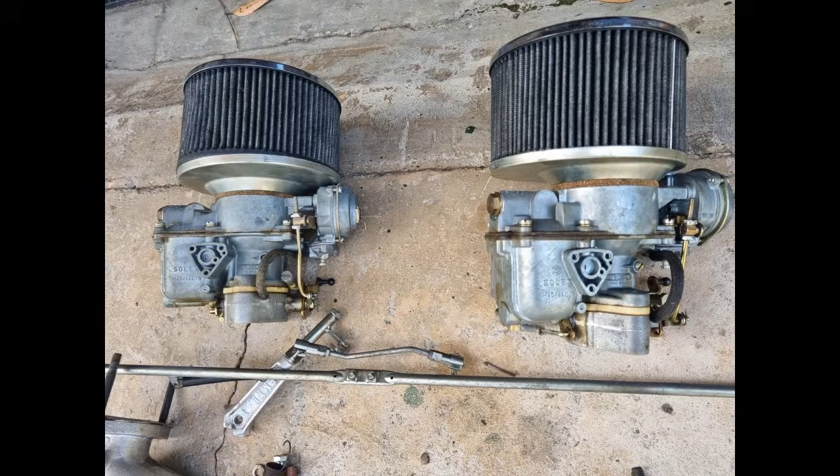Initially it was the '76 T2 bay window Kombi, air-cooled, 2 litre, all original, still mostly original paint except for on the front. It was a bit lacking power, so we tried a carby upgrade, which didn't make much difference. We went electronic ignition and a few other things, but we just wanted something with a bit more power.

As you can see, we like to go camping and stuff, and it was alright to drive as a daily. I had it for years, put a smile on my face, but in summer it was very hot inside the car because we live in Queensland.

So aircon was good, and we wanted a reliable daily, so we went Subaru in the end. This is where we first started just getting it lifted slightly.

Now, we did not do anything special. This is just the rear end being raised with the torsion bars to a fairly safe level. That's the original wheels and tyres.

The front was already sitting fairly high, which is good. It hadn't sagged, so not much was done to the front end, actually. We just had the back end lifted a bit, and you can see it's quite a bit higher even with the standard wheels.

We then also upgraded to some bigger wheels and tyres, so we didn't want to go crazy. We also fitted sliding glass windows all around the back, which made a massive difference to how cool it was inside that car when you drove. Just crack one of those back windows open and it was fantastic.

Now, this is with Mercedes-Benz Vito rims, 15-inch ones. There's different offsets, so make sure you get the right offset. The ones that are too deep dish you don't want. We ended up with 3 of each, so we've got all new tyres. The tyres are 215 75 15 Nankang all-terrains.

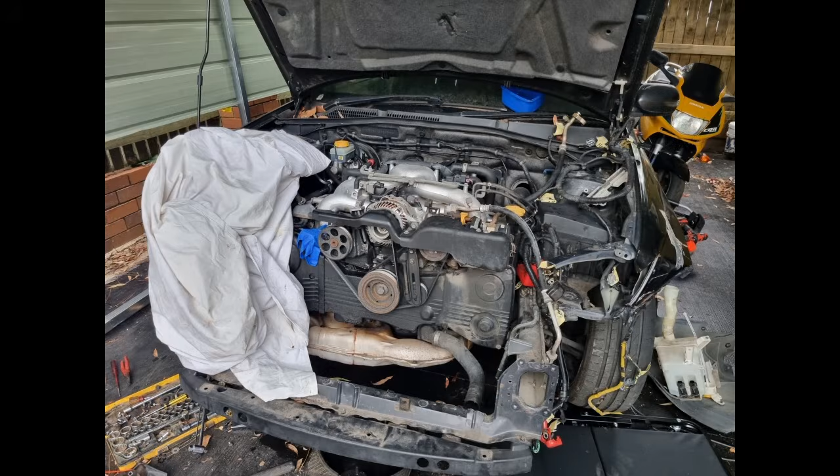So that's the donor car, which was a 2007 Subaru Liberty. You can see it's got a bit of damage there. I bought that for $700 and it still drove. Automatic EJ20 double overhead cam, air conditioning, everything still worked in it. It had a week's rego left. The guy crashed the front section and I bought it for $700. Had about 250,000 Ks on the clock, which is not much for these cars. That is a 4EAT automatic transmission, which is the one you need if you're going to do the Subaru conversion to automatic.

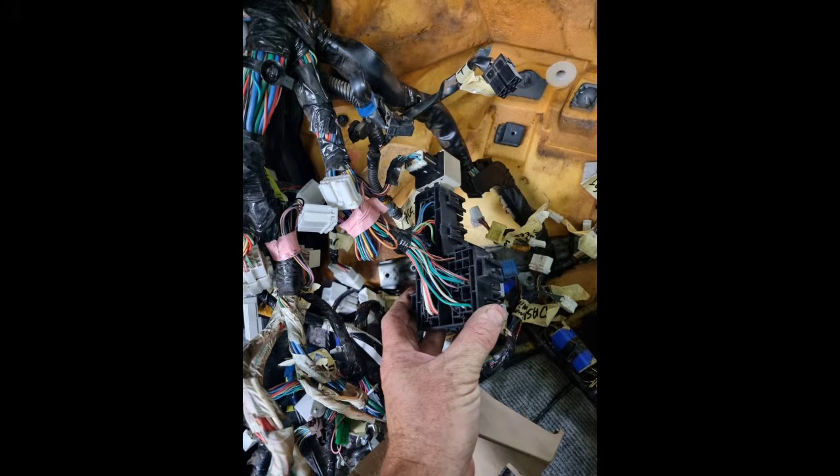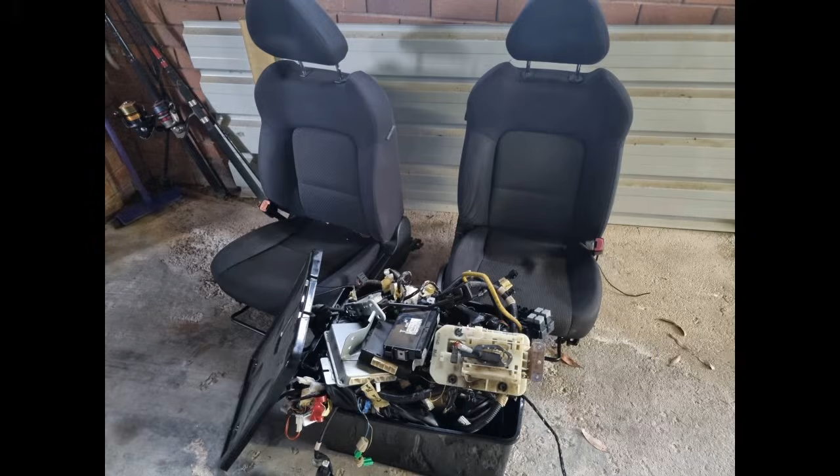So basically I removed everything. Get a donor car, don't buy parts here and there willy-nilly, and strip everything out of it. We took the ECU, all the wiring, the throttle, because it's fly-by-wire, so the accelerator pedal, just everything. Don't throw anything out, just strip the shell. Even when you've got the shell, it's handy to hold onto it for a little while in case there's nuts and bolts and stuff you need. I moved mine on and then accidentally realised I didn't collect the ignition barrel, which I needed, so I had to go back to the place I gave the shell to. Make sure you get everything out.

That's the box full of parts. I took the shifter, the factory shifter. I ended up building a little box for that to sit in. That's the ignition barrel, the thing I almost lost and didn't have, which you need when you do the wiring. The wiring is a nightmare.

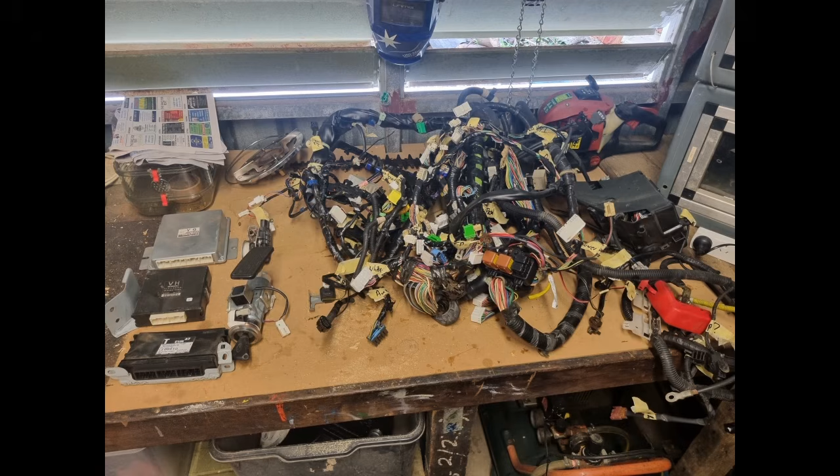If you can do it yourself, go for it. If not, I use AGT Engineering at Newcastle. I think he's Andrew, fantastic, did a great job. Send it to him. Did it all. It costs you a bit, but you get it back. Plug in, get all the modules. One of those is airbag, I think, but the other two, you've got to make sure you get your body control module as well as your ECU.

So the process I did, obviously I stripped it, got it all ready, and then I started removing the original running gear from old Lucky. We call him Lucky, the Kombi. It was in great nick, we sold that on, and as you know, air-cooled engines and gearboxes, especially a 2-litre gearbox, fetch silly money, so that helped fund some of this conversion.

That's just me mapping out something at the front there, because I wanted to have a front mount intercooler radiator. Came across this bull bar for a couple hundred dollars, thought I could make that work. It was off a Kombi, just painted it white. Had to trim that middle bar out at the top, and the radiator and that I got was just all off eBay stuff. This is out of I think a 1970s or 80s Corolla, and it was just a thick triple core, all aluminium, fit in there really nicely.

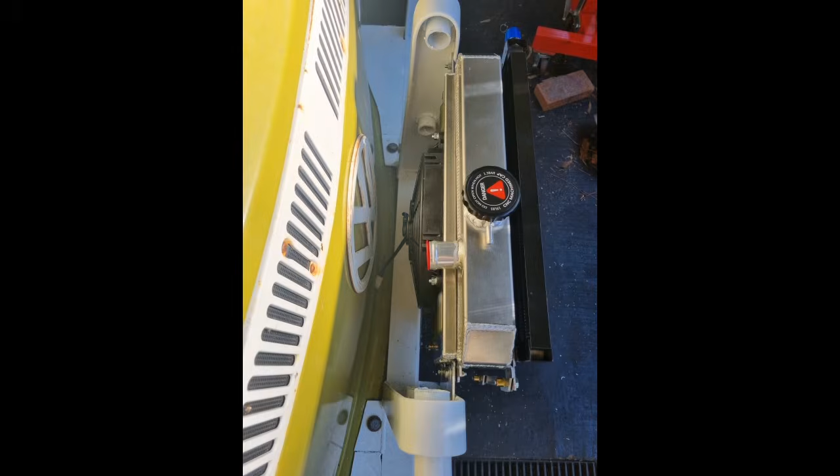That's the original air conditioning condenser, which I have since replaced because the eBay crappy ones didn't work. It was not enough fins and rows. Those generic ones just couldn't cut it once it hit about 36 degrees. So I've now switched to a Daihatsu Terios one.

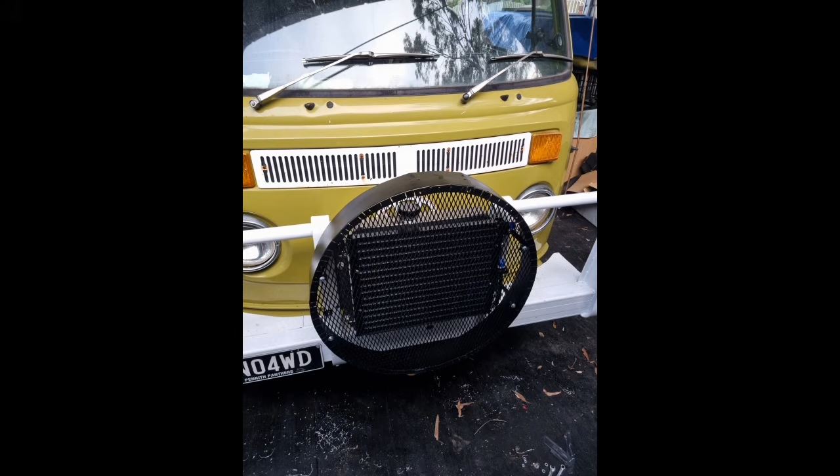This is just me making up a cover. I made up a fake wheel at the front. That was just some tin metal, a few slots in it to bend it, and some of that hard mesh, to make sure it doesn't get stone chips. Painted it all black, fitted it, realised you can see too much through it, you can see right through. It looked a bit weird, you know, when you have a spare tyre there, it's all black. So I ended up just cutting a couple bits of timber, top and bottom, and sit them in there to block a lot of that out, just to make it look more like the spare tyre. The little bits on the side you hardly see.

This is the shifter mechanism. Using the factory shifter was good. I used a 12-foot speedboat cable off eBay to connect it. It was quite cheap, well less than $100 I believe, like maybe $50 or something.

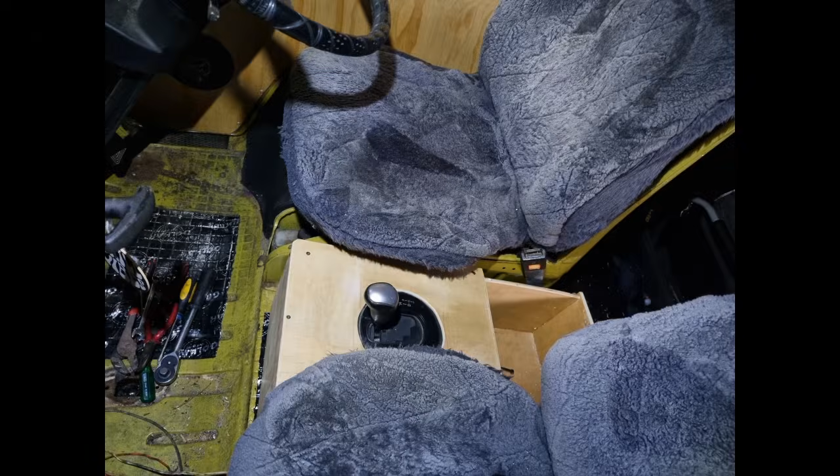I made up a little wooden center console. I left a nice big box behind it so I can put milk, bread and things in. We've put a cup holder on the front too. It's fantastic, sits in a great spot, easy to use. It's the sport shift auto, so you can change up and down gears. Everything works - that's the shifter cable I bought on the right, very similar, I had to cut and weld.

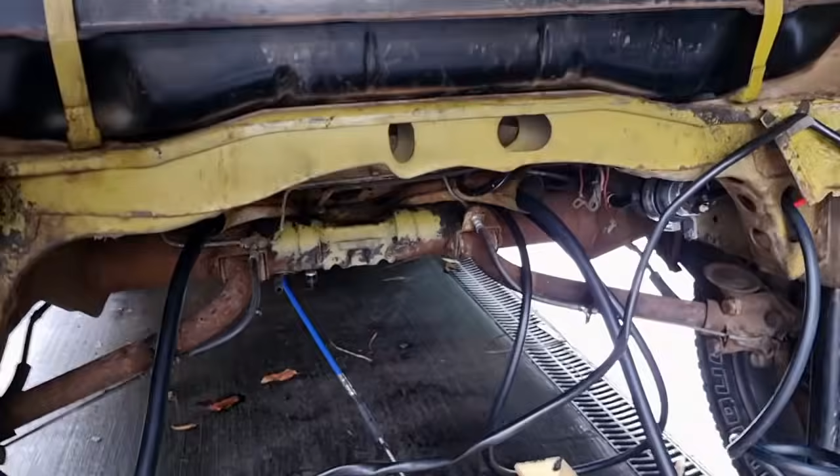Quick update here, because I've realised there's not much info out there on doing the Subaru automatic and EJ25 into the T2s. Plenty of info on the T3s, but one of the major issues is there's no off-the-shelf engine mounts you can get.

Obviously the old bar used to go here, can't use that. This area is where the ones available in Australia, like Volks Mods, fit, but that's for mounting an EJ motor to a VW box. When you're mounting the automatic, it sits a lot further out from here - further forward, from the videos I've seen in America, maybe 3 or 4 more inches than where the EJ meets the Volkswagen box.

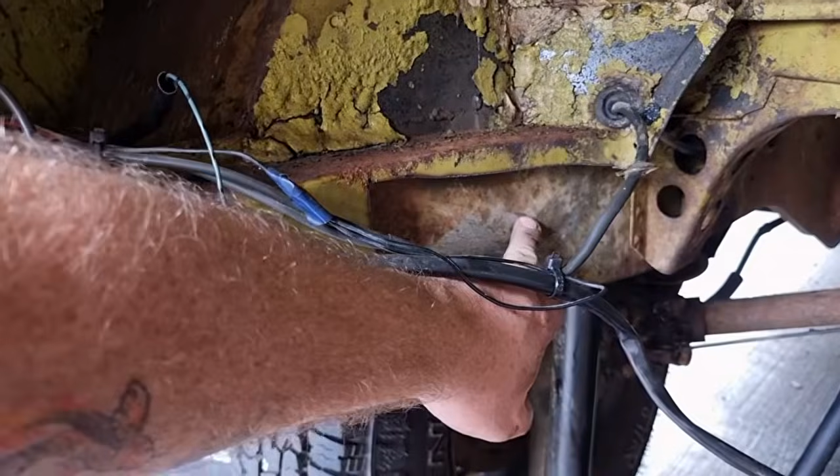So it sits a lot further out, which means engine mounts on the EJ need to bring it further forward, up to about this area I believe, where it curves in. That means the one I bought that mounts to here is no good - I might have to get one custom made to go here, because it's a lot wider with a bit of a curve.

But I'm going to wait until the engine is dummy fitted up in here with a block and tackle or something before I decide that, because I've got to mount the other end of the auto.

You'll probably see the cable there, it's a 12-foot marine cable. That's where my return hose goes in - I'll get a proper bung for that. Return line for the fuel tank, you can probably see up there.

I've got a Bosch electric fuel pump. Had to get an adapter to go from the tiny outlet of the fuel tank, something like 5 mil, up to the bigger hose - which is 5/16, pretty much what all the Subarus use. So I've got my inlet and outlet sorted there.

I've got to wire that up. I've got AGT doing the wiring, so I'm going to wait till I get it back from him before I do anything else.

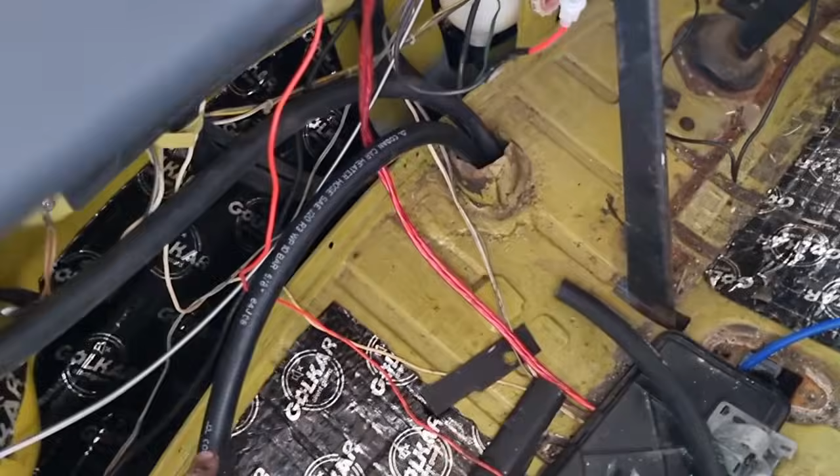Up front, I've got the aircon going in here, mucking around with that. That's the heater hoses coming up, that's a unit and shifter - just pops out the front there, cable goes down and under.

Okay, so as you just saw, that went through some stuff there. This is the engine, just sitting outside it. As you can see, it's a double overhead cam version. I didn't buy it for any particular reason, it was just the best donor car I found at the time. In the end, there's a lot of good things about it - it's more powerful.

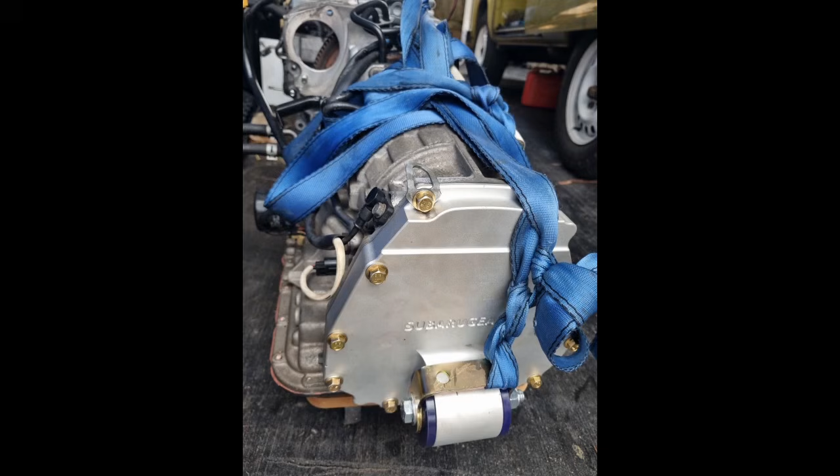I initially went with a Subarugear chain setup, because at the time that was the only one available on the market. That's it being mounted up - as you can see, it only runs the front wheel drive part, not the rear. I ended up having troubles with this and had to switch to a different system. It was extremely loud, the chain just drove me insane. You'll see from the videos.

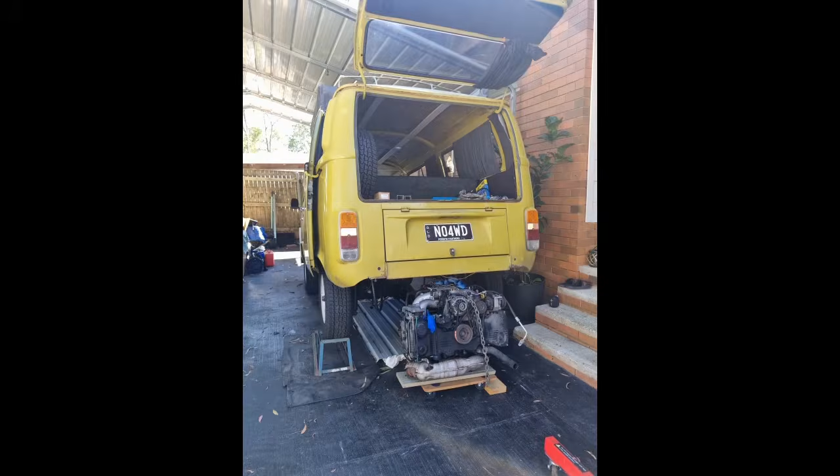Getting a much bigger, heavier one in was a bit of a pain. So I got it up onto the stands there, then slid it under on some old tin I had, scratching up all the concrete, then lifted it up through the gap with an engine crane.

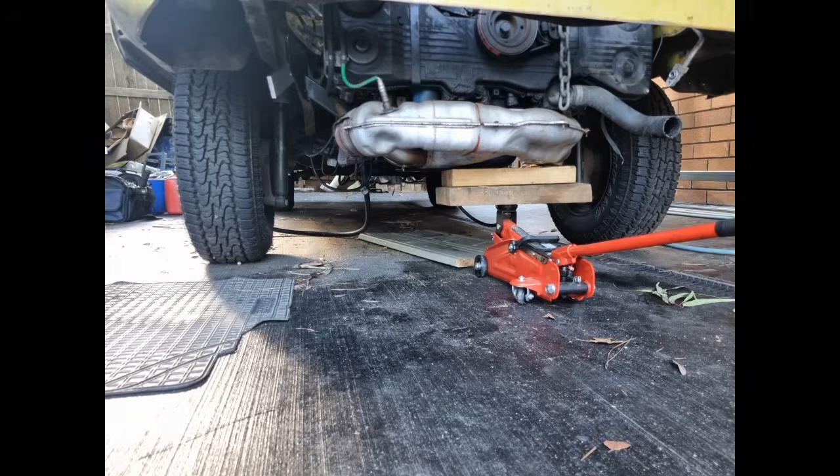I did all this by myself in my carport, so you can do it too. It's not rocket science - you've got to have a bit of stuff and a few tools, but it's not unachievable. So this was just trying to figure out where I'm going to sit it. Initially I wanted it as high as possible because I want to go off-roading in this thing.

Okay, update. We're starting to get there. Got the EJ20 in, trying to get it up as high as possible because this is kind of an off-road bus, so I've still got a good 30 centimeters of clearance there.

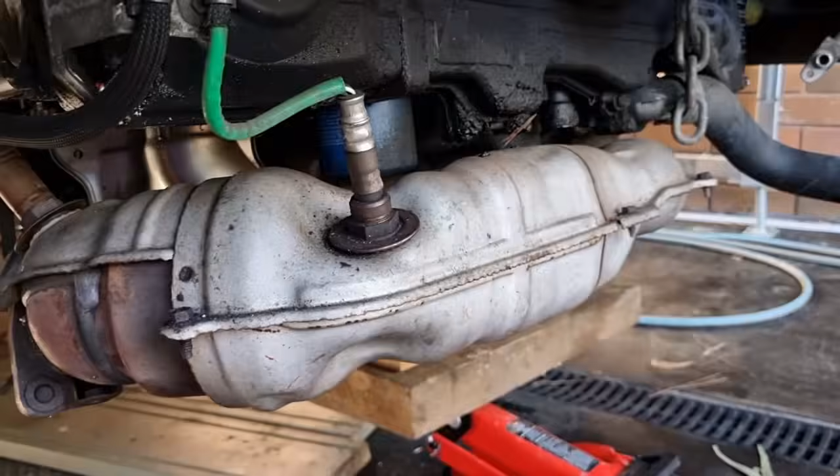In my setup, I'm still going to use this factory exhaust, which just comes out to here. As this cross member I'm about to do, I've got the 4EAT Subaru auto. Yeah, so as you can see, there's a lot of test fitting. Each car will be a bit different, whatever gearbox, whatever engine, whatever cross member you use.

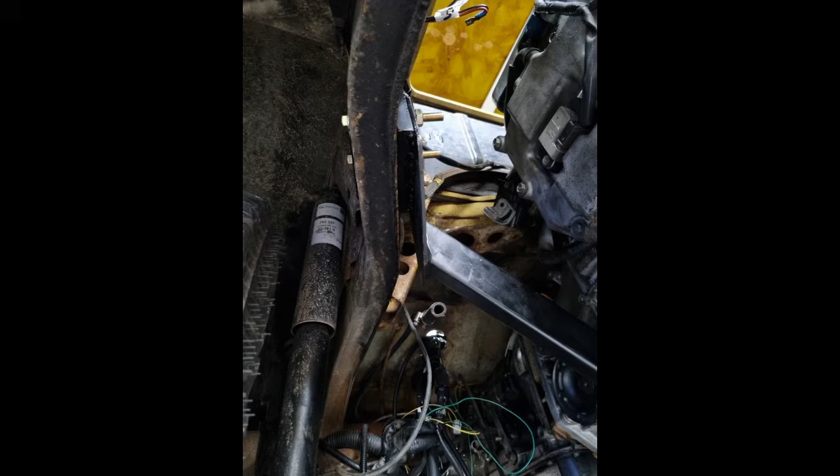I ended up using a cross member, just modified it slightly. So I did initially have it raised up fairly high. I was just eyeballing it from other people's jobs, getting it sitting nice and flat. So you can see there I had to put a little spacer in, solid steel, on each side, about 12 mil plate, and I actually welded it and then drilled the hole right through to sit it in that exact right spot.

That seemed nice, but I did end up dropping it slightly because I had issues with my CV joints later, which I'll go into detail later. So don't sit it up as high as possible - it may affect some things later with the 4EAT, if you've got a raised bus. If it's not raised, it doesn't matter.

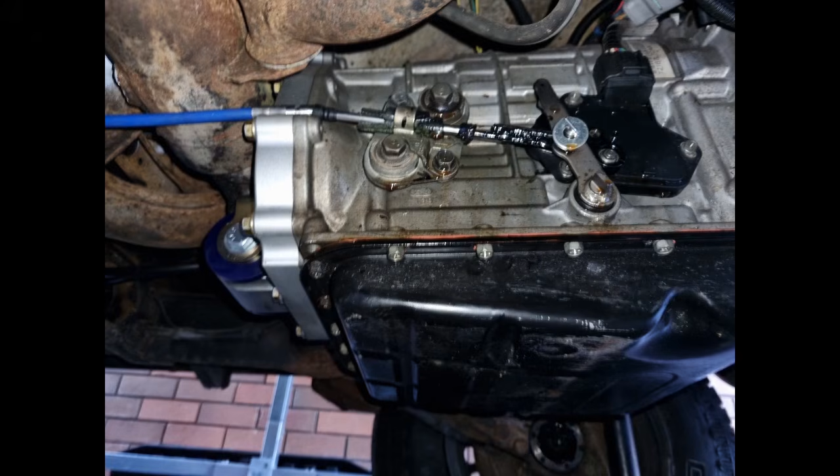So everything goes under the back seat there. That's the cable from the 12 foot boat cable. Ended up with that one.

Okay, quick update. I think it's about the 24th of August. Motor is in.

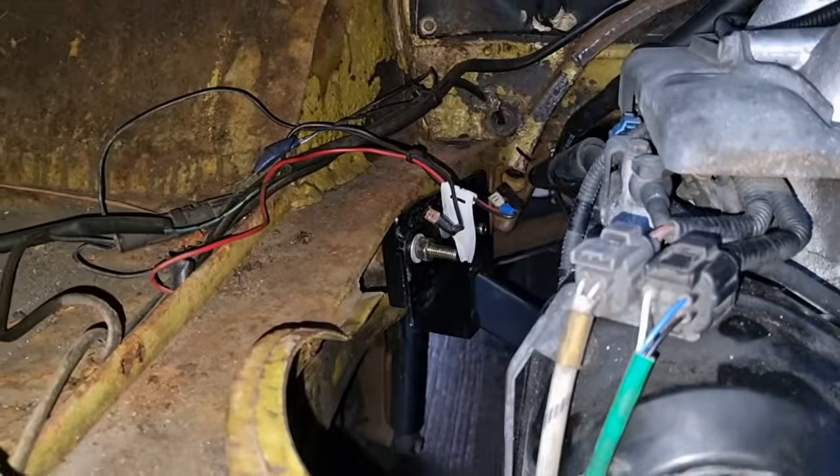Engine mounts - I'll turn this light on. Done down there, both sides. Ended up using about 16 mil solid piece of steel. You can see down there in the middle there's a spacer, but I actually welded it to the original one, only because the whole engine sits a lot further forward, as you can see, than a Volkswagen one does.

Not as much as I thought in some videos I've seen - I think different makes and models vary. You can see with my throttle body, still don't have much room, a couple of fingers, but I've got a few ideas for that.

My return line for my fuel goes up into there. It's a special fuel line that can be submersed. Goes back, plumbed down the intake pipe. All the fuel system is now hooked up. I'm keeping the aircon because I'm going to run aircon.

I've got some wiring left to do. This is a double overhead cam one, so it sits quite nicely.

We wanted it high because we want to go off-road, and with this we've got a limited slip diff fitted into the automatic Subaru gearbox as well. Still got about a good foot of clearance.

In this model, the exhaust is actually really good. It wraps around, I guess, the sump and sits quite nice and tight, and the outlet's just here. So they'll have a catback exhaust - all that stayed on it when I did the conversion.

I don't need to pull it off for the sake of maybe saving 1 inch and spending a fortune on a custom exhaust. See if I can see, so you see it sits quite nicely tucked up in there.

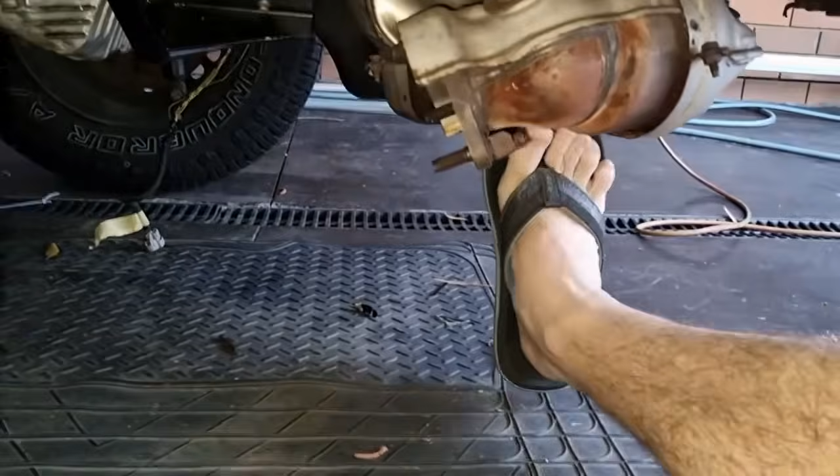Same, there's the sump, it's the bottom of the cross member, bottom of the gearbox, so really it can't go that much higher. I'm not a big foot, but it is about 30 centimeters to the lowest point, which is pretty good for what we want.

They had backing plates on that bloody thing that was from a pre-made one from Volksmods.

Underneath is the auto hookup. Still trying to work out this bloody thing.

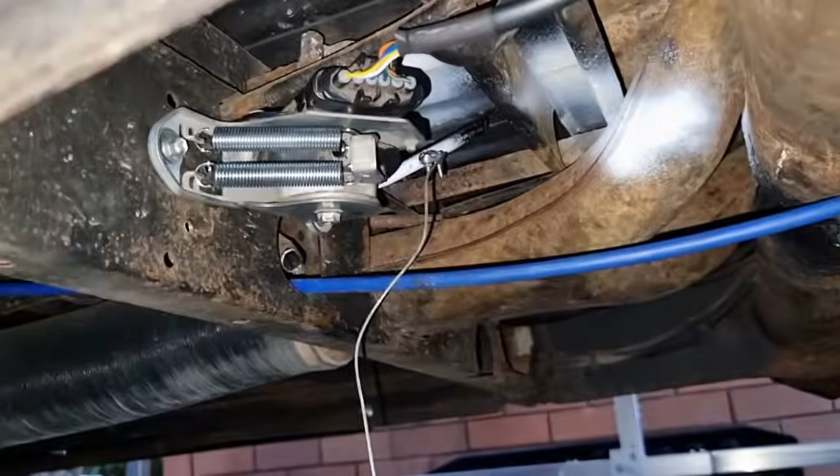Okay, so after that video, a few things changed anyway, but as you can see from the throttle body it's quite close, but you can actually fit it - I bought an eBay 90-degree bend and it fits on there.

Just another note too, I forgot to mention, just under the fuel tank you do have to cut some of the metal out prior to fitting the Subaru stuff. Here's the first start.

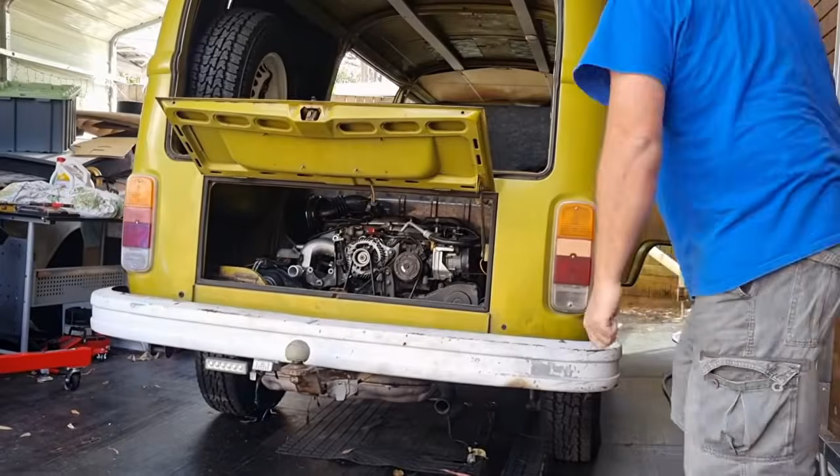Obviously it was a bit loud. Idle wasn't set, the throttle body and all that wasn't working in that setup underneath. I tried to listen to other people on the internet, it didn't work out. So I had to change that later and use an accelerator pedal, the e-throttle or electronic throttle, fly-by-wire throttle, pedal.

That's the end result there of fitting the air filter. It's neat and tidy, tucked way up under there. I'm thinking about putting a cold air feed to it as well through one of the vents. I had to trim that up. It has a 2.5 inch to 3 inch adapter, bought off eBay, and I just had to trim it at a slight angle.

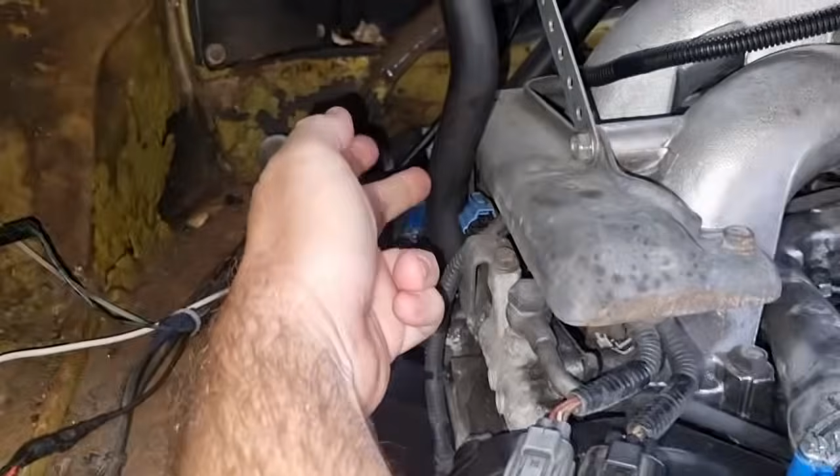The pipes coming off each side, like down here, are just breather pipes off the top of the rocker covers. I just run it back up, kept this filter and it bolts straight on. That's just a charcoal canister filter, so they've got to be vented into something. Same with this one, I attached it with extra hose from that side and took it up into the same charcoal filter.

The other line you were looking at that runs off the back over here somewhere is the brake booster. That runs to your brake line down the back there. You see mine joining in down there somewhere, that black line comes up and goes in.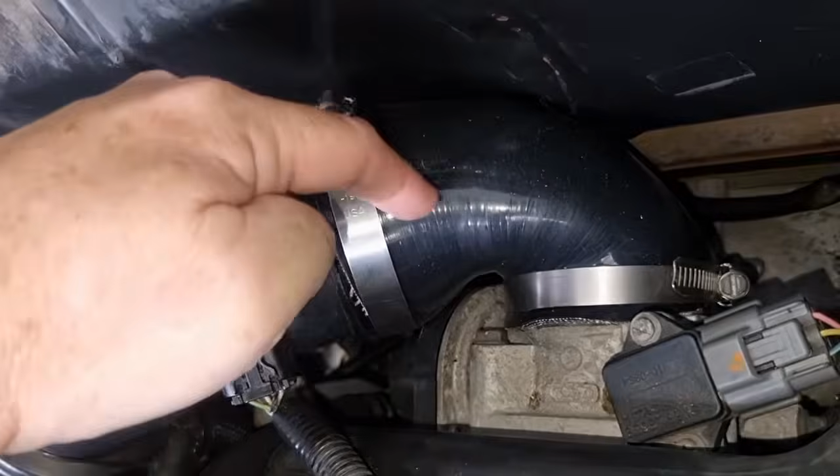I used a lot of my factory air intake and modified it and just put that there. In the top, I bought this off eBay because it's a tight fit here. I left my original intake because I'm running a Subaru gearbox, so mine sits a bit further back. I was able to buy this off eBay, like a 3 inch to 2.5 inch adapter, had to cut it to fit. It's not perfect, but it does the job, gets that bend in, and then I can run the original MAF sensor - all factory bits I just chopped up to make fit.

That pipe underneath just doubles back into itself. This pipe runs down to something down there, I can't quite see, can't remember. I'll check if I got photos of it from when it was out of the car, because I pulled it out of the donor car and did it all myself, so I'll look and see what it is. That pipe actually ran to the secondary air pump, just an air pump thing that was on that model, nothing important. This is the radiator shop that did a good job, but charged me like a wounded bull.

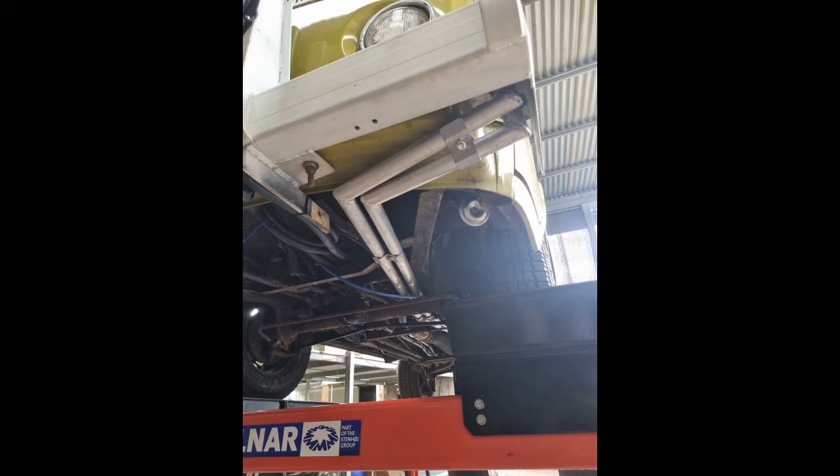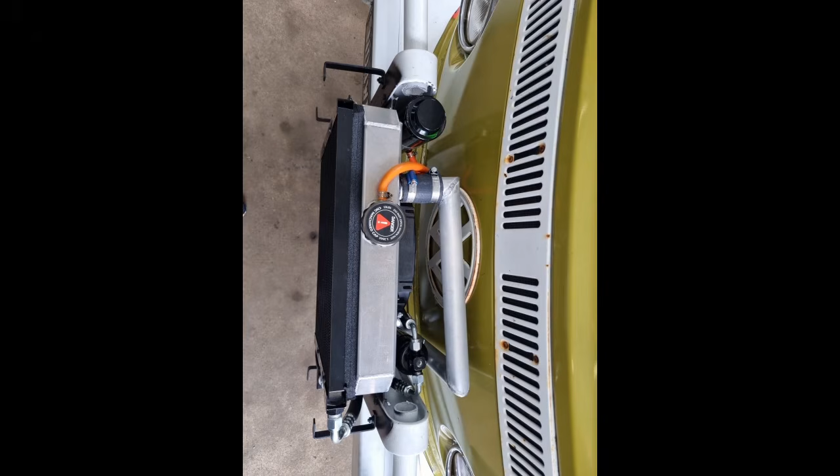This is my biggest lesson learnt here. I said I just wanted some pipes to run the radiator at the front. Thought about doing it myself because I did everything else mostly myself. I told these guys I wanted it tucked away, but as you can see, they took it too far and charged me a ridiculous price. We negotiated a bit and came down, but it's a fantastic job and it works. As you can see, it's all tucked away, super neat, but it was a crazy price. So if you can, do your own radiator pipes.

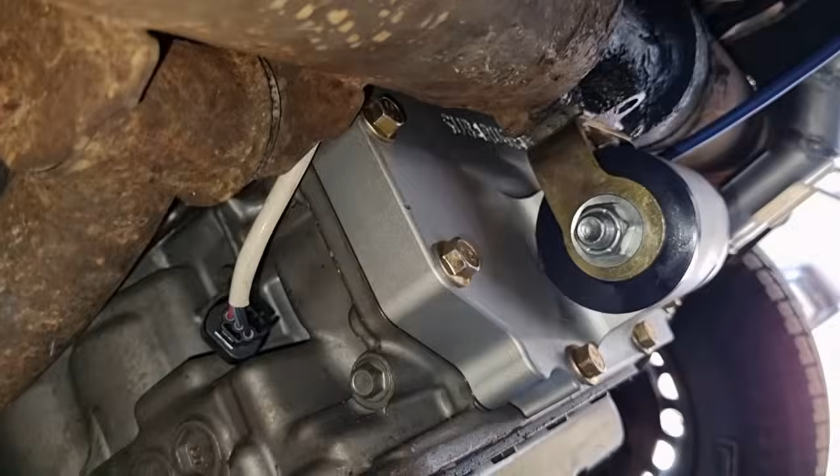That's it getting finished up there. We had a few issues at the start, teething problems. That noise turned out to be the fuel pump system and the fuel system, which I'll go into more detail about in the fuel section coming up soon.

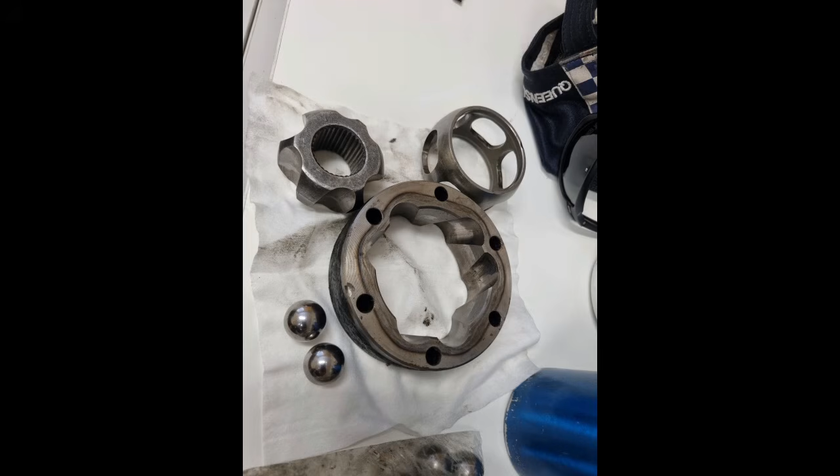And this is the fun part, CV joints. If you're not running a lifted bus, it's probably not so bad, but it's hard to tell in these images - the angle at which the Subaru automatic gearbox sits makes the angle of the CVs sit quite weird, front to back, not just up and down. So I actually think you need longer axles. I'm still looking into this, because even though I had everything clocked right, I still got this noise.

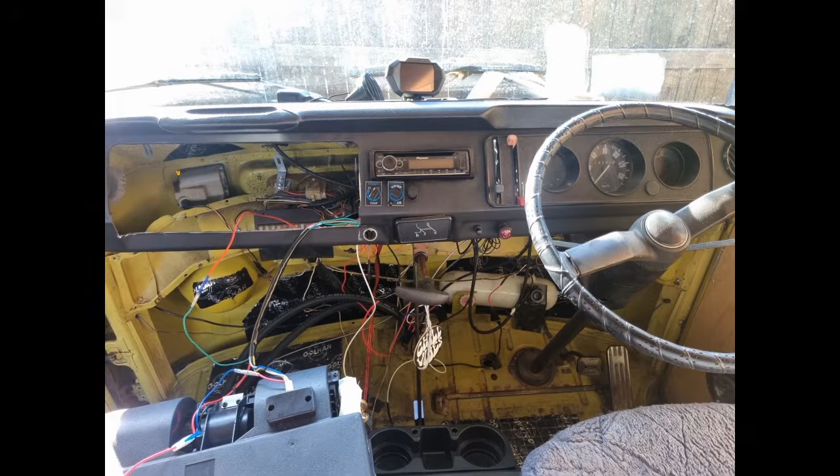I tried several sets of CV joints and it was driving me insane until I figured out the angle front to back. Because my bus was also lifted, the combination of lift and angle meant the shafts were stretched, so I had to change it around a bit, but I finally got it sorted.

This is just starting to set up the aircon. It's about the only unit I could find that would work. It's not pretty at the start here, but it works. I needed one that had heating and cooling, and this was only a couple hundred dollars, I think 150 bucks or something off eBay, and it did heating and cooling, and it works fantastic. I'm using the rest of the parts being the factory Subaru in the back.

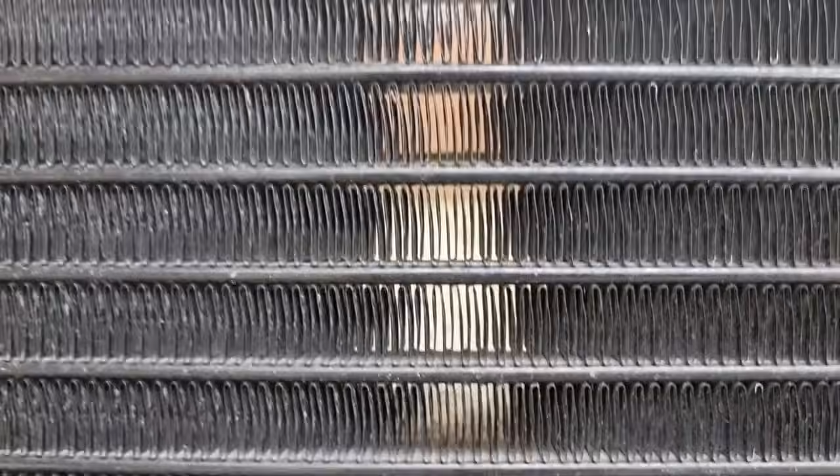The fins - I think I counted only about 15 or 16 actual rows, and the fins much thinner comparatively. There's got to be, I think, triple the rows in this one - about 50, 60 roughly, maybe 45, I can't remember. I'm not going to count them now.

You can see it's a lot harder to see through. I know it affects airflow compared to that, but cooling efficiency is why most factory ones look like this, and there's a reason - aftermarket generic cheap stuff doesn't work. So let's see if this actually makes a big difference. I'm still at the point where I've got to get it regassed and try it in the heat of summer, but it looks a lot better, more factory.

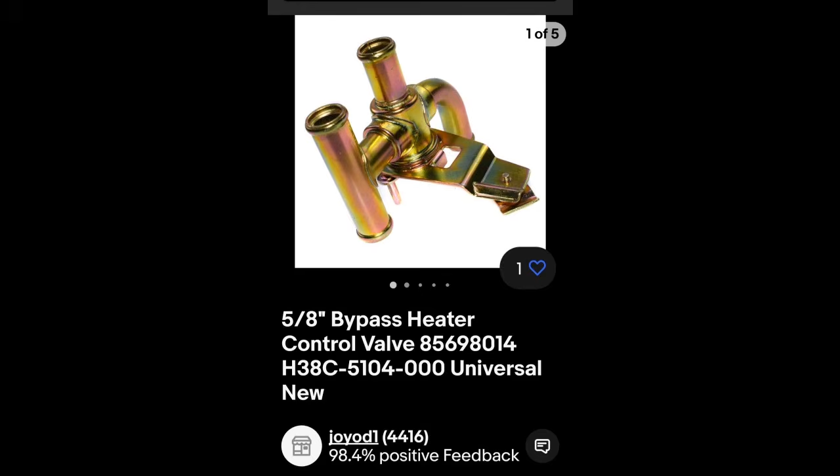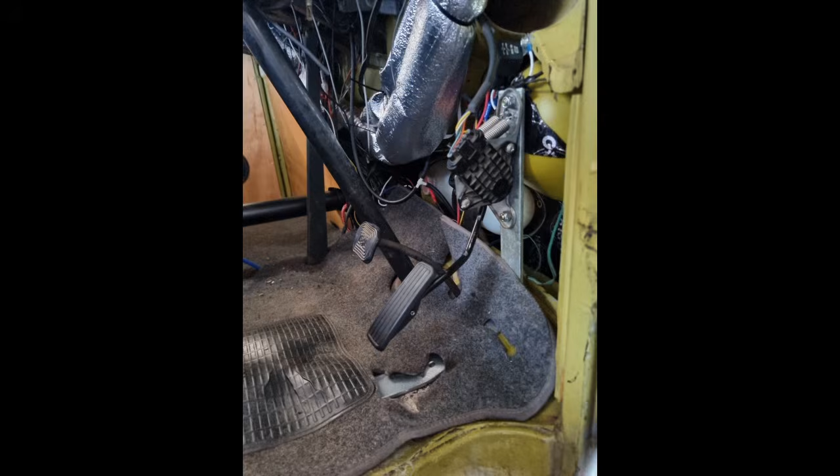And this is the accelerator pedal. At first I tried this sort of one that was mounted up underneath by modifying it, which is what some other people recommended - way more work, way harder, and didn't work. I could not get the spring, the feel for it to work. I ended up using the factory one and just made a very simple bracket out of a Bunnings L bracket that I bought and bent to the right shape in my vise, with a few screw holes, and it bolts on. One of the springs at the top I ended up taking out and running a lighter spring because the pedal feel was too heavy. But in the end, a slight bend on that thing and it works perfect once I bent the rod slightly.

I had a hell of a time getting this cover off because there's two bolts way up here, and my gearbox wouldn't drop down far enough because of a tight fit at the other end from the throttle body, the exhaust, things like that. I ended up having to use this chock of wood to force the gearbox down a little bit further so I could get these top two bolts out. Glad I did - it looks nice and clean. Mind you, I've only done a couple hundred kilometres in it.

This top part of the chain's quite taut, this bit has a bit of flex there, but I noticed I had quite a lot of whine.

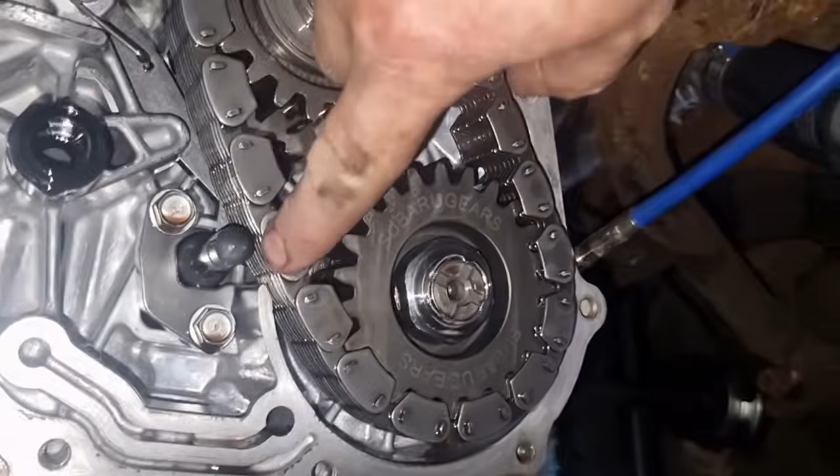Sorry, just under the car here on the floor - had quite a lot of whining going on with mine, and I paid a shop, a professional shop, to do this, and have a look at that. I'm pretty sure if I get around there I might even see - now this is hitting right there and rubbing. They didn't clearance this section. I asked them and I'm pissed off, and I'm very glad I do it myself. This is why I like doing this myself instead of paying shops hundreds of dollars to do a job. It's almost even hitting that pin.

Not quite, but if it really stretched it would. So now I have to take this off and replace it with the new sprocket, and clearance that, which is something they should have done before. Now I have to be very careful because my oil pan is on already.

I have to block everything up under the car here and try to clearance that. Anyway, okay, this part, I finally got this out. This is the existing one, that's the rest of it there. I had a hell of a time getting a 35mm drive in there, but anyway, got it.

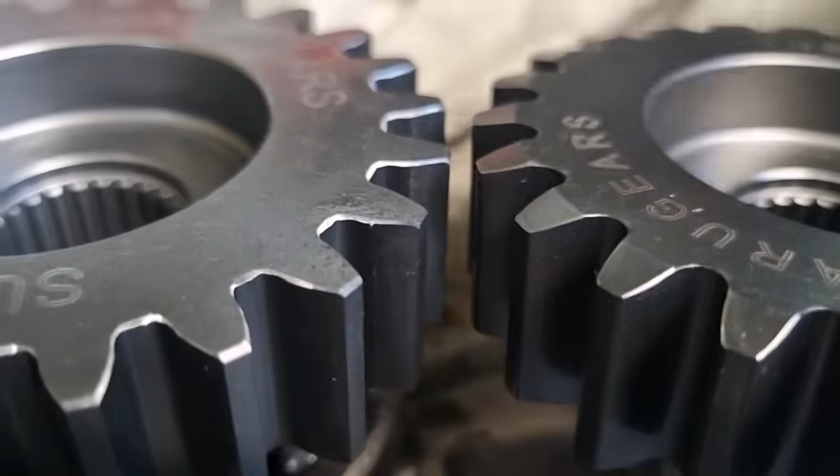Now comparing this, the old one and the new one, new teeth, new design, or revised, whatever you want to call it. The first major difference I can see is this bit, a curved edge here, none here. You can see this one's been used for not very long, but you can already see wear on the edges. It certainly does seem to wear on that edge, so having this curve might make a difference, I'm hoping.

The other big difference from above is the curve, like this, a real curve. These were very square, they used to go down, across and up. So you can see, even though I haven't done very many kilometers, probably total 200 or 300 kilometers, if that, before this new one arrived.

I can see some marks on the pulley already, on the edge there, you can see. I'll try to get my little pointy thing in here. So that wear already, and I think that's why they've redesigned this edge. This whole edge is different, seems a lot smoother, because that definitely does seem to be where the wear is on this one.

So the point of this part was just to show the difference in the new Subaru gears kit that they brought out. Some people have used it and seem to have some success. I found it to be very loud, as you'll see from videos I've recorded, but that's just my personal experience, not even opinion. This is just what happened, and I'm explaining my process I went through to end up where I've ended up. So yeah, this is the chain system, the new one.

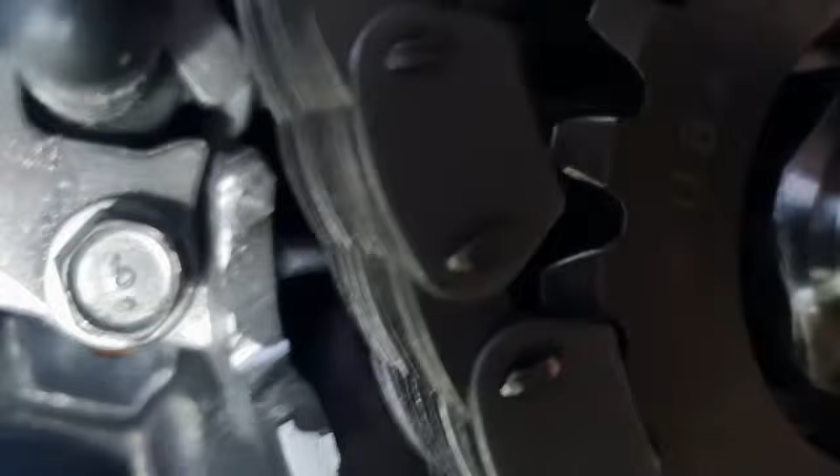The other one was already quite loose. This one, oops sorry, that's me moving that chain, that's got all movement in it. So yeah, hopefully it works. It will stretch slightly, I guess, but fingers crossed.

So using the chain system, you obviously got a bit of metal on metal grinding there, so little tiny flakes were coming off, you could see, in the oil.

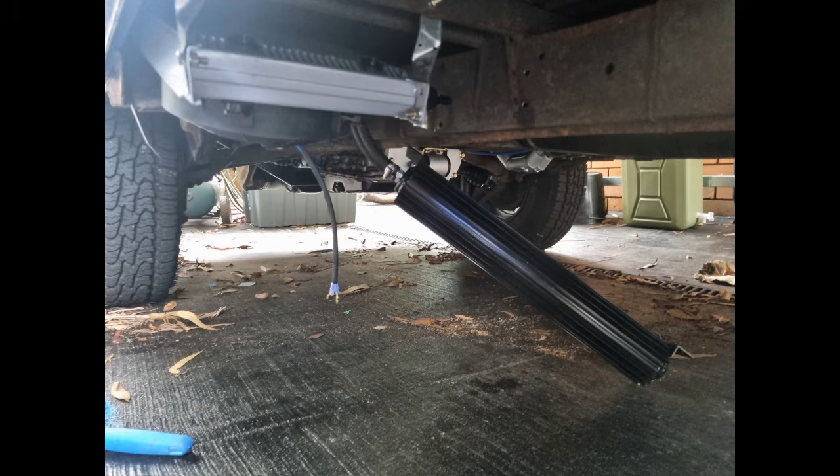Jumping onto this, it's just a transcooler. I originally just had one of these bar heatsink style ones, just didn't cut it. You really do need a little fan, little radiator style one. So I decided to run both, in line with each other, through one and then the other. It's not going to do any harm. I also run a thermo switch, so the fan only comes on when it hits about 190.

This is driving it. EJ20 Kombi, Subaru gears, automatic.

Okay, so it's inside the case, I just took it off. You can see all that black starting to run down there. It was sitting, that's the bottom, so there's definitely some metal or something there.

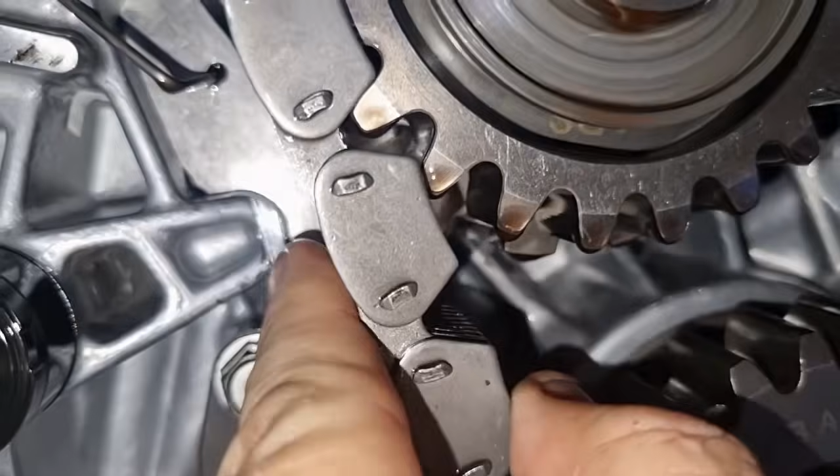You'll notice up here too, look at that, it's scraped away the casing. That's not a spot you're told you have to clear it - you have to clearance it down here, which I have, and that's been okay.

And I noticed up over here too - oh, get the phone, sorry, try to get in there, just up in here. A lot of scrapes along there where it's hitting this side, look at that, and on the outside, it's almost hitting on this side. I'm sure it's hitting this rod, making a lot of noise.

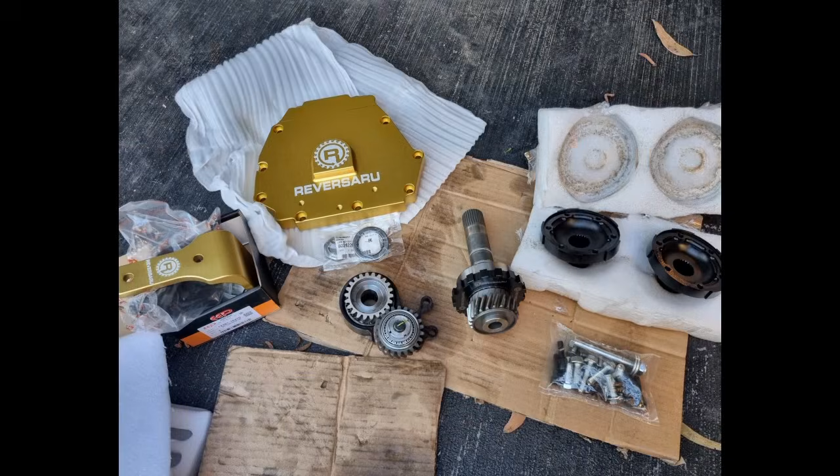So I had to bite the bullet. I switched to Reversaru, and I haven't looked back. As soon as I put it in, it's whisper quiet. No whining, no nothing. Very different kit. Worth it, a little bit dearer though.

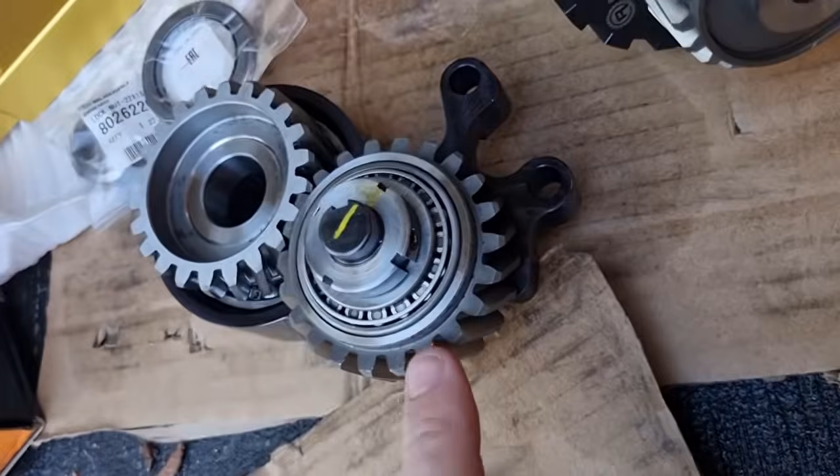And so here it is, what I've been waiting for. So this kit allows the Subaru 4EAT automatic transmission to run in reverse. They go into the transmission to mount to micro shafts, bolts. This is the main shaft. This is the patented center cog, I suppose, and just the mounts and stuff like that.

Yeah, I'll do some videos as we put it together. Okay, so I'm just under the car here.

I've replaced the Subaru gears with Reversaru. The Subaru gears just wasn't working for me. It was very loud and whining, and yeah, a few issues, so I ended up going Reversaru.

So this is what $4,000 looks like. This is the new kit. I think I might be the first in Australia. I'm actually helping test it. That centre bearing, the one with the yellow line there, sorry, the centre sprocket thing, transfer plate or whatever they call it, that is the new part. It's got a much bigger bearing in it, as you can see it goes almost all the way around to the edge. So I'm at the point now where I'm about to put this nut on here.

I've just tightened it up and set the backlash. Yeah, so it's easy to install. As you can see, it's hanging just under my car. Didn't have to drop the whole gearbox out. I just had to undo the rear mount and lower that end down, and I was able to switch it in and out between the old system and the new.

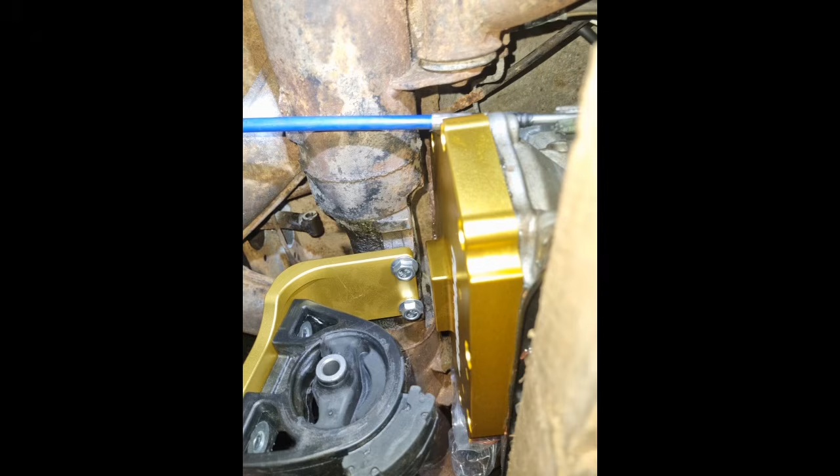Really easy to do. Phil Hocken, who does Reversaru, was fantastic. Just helped me out with everything, whatever questions I got. Clearance is the big thing. You got to make sure you got clearance up the top there. So yeah, there's a trick to that I'll mention in a moment.

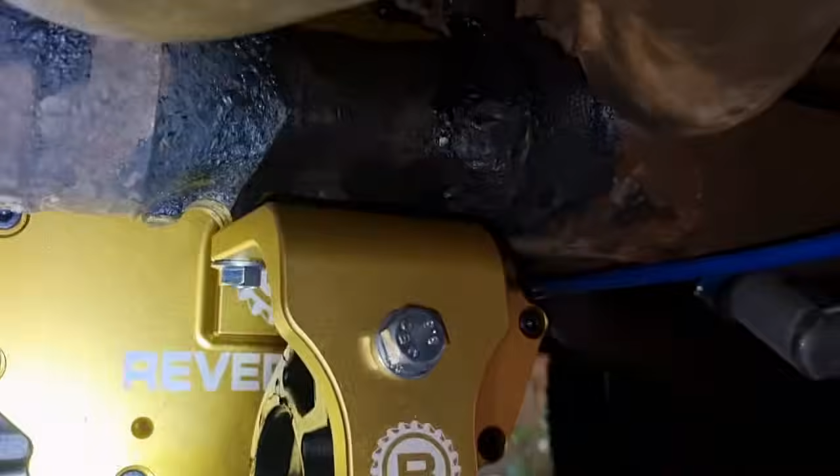So trying to just show the clearance up there on the Reversaru. So it's tight, but there's enough gap there, especially because it'll probably drop down slightly when I mount it. I noticed that the mount sits a bit lower from the back there, and I don't have it yet. It was just a bit of an oversight, it didn't get packed in the kit.

So yeah, it's in. I had Subaru gears, and now just changed to Reversaru. Hopefully no more noise. Okay, so what I've figured out or looked at here is, because I had the previous Subaru gears chain system and had to cut this bit out here, I've later found out that this part here is actually like the sump, the reserve well for this gear to spin and flick up. It's a splash bath apparently.

So by cutting that down, you're reducing the oil level massively by about an inch there. Wouldn't be so bad with the Subaru gears or the original system, because their pulleys are much bigger and go all the way around here. But Reversaru has much smaller gears, because there's 3 instead of 2.

So this bit here is not sitting in much of the lubricant, the trans oil, and splashing up and oiling these, and these are the bearings that were failing. So this level, when I put a little rule across it, I mean, I'll try to hold it just there, but you can see for yourself, if that goes across their level, it's barely touching the bottom.

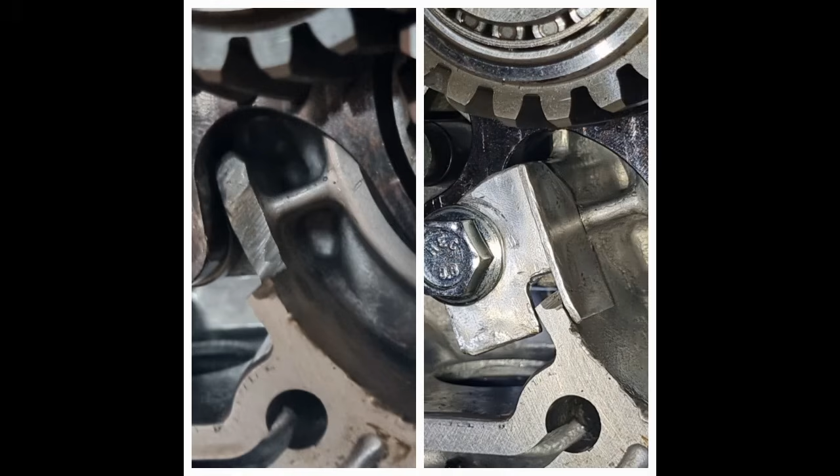That's it in place at the end there, and it seems to be doing fine, showing the different levels.

Now my other little trick I mentioned before about getting clearance at the top - if you've got your gearbox out and you're doing it for the first time, just make sure you clearance that lip up the top they tell you to. But unfortunately I wasn't, my gearbox was already in. So what I did, I just jacked the gearbox up and actually used the top of the gearbox to push the last little bit of lip up to give it about a centimetre clearance so it doesn't vibrate on the bus. But it does the job.

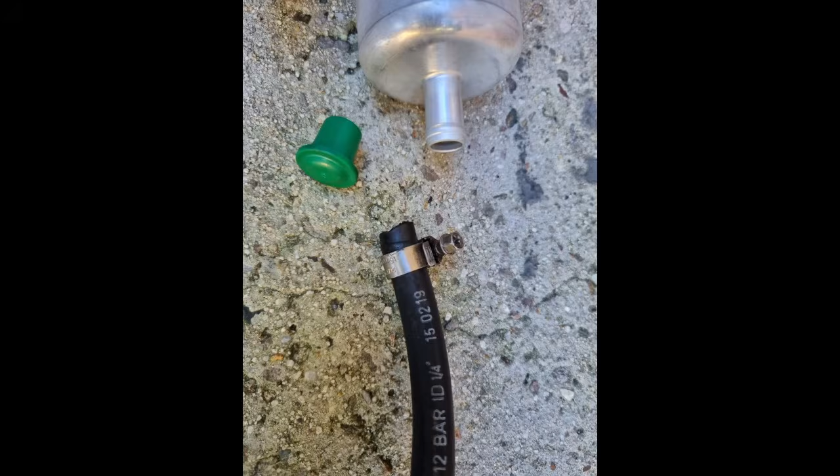Okay, the fuel pump used is a Volkswagen T3 Kombi one, a Bosch one, only cheap, about $100. It's got a big outlet at one end though, so I had to use a brass reducer from the tiny outlet of the Kombi tank. There's no swirl pot or anything, it doesn't need it because the outlet's at the bottom of the tank.

And then with Subarus, they have a deadhead system on this one, not a return line, so I had to wire it up differently. You'll see in the next video. Some Subarus have 3 hose outlets, this one only had 2. It took me a little while to figure that out, so that's what that weird noise was when we first started it back at the radiator shop - it was actually the fuel pump over pressurizing.

So I had to fit this fuel pressure regulator, and this part will explain what happens there.

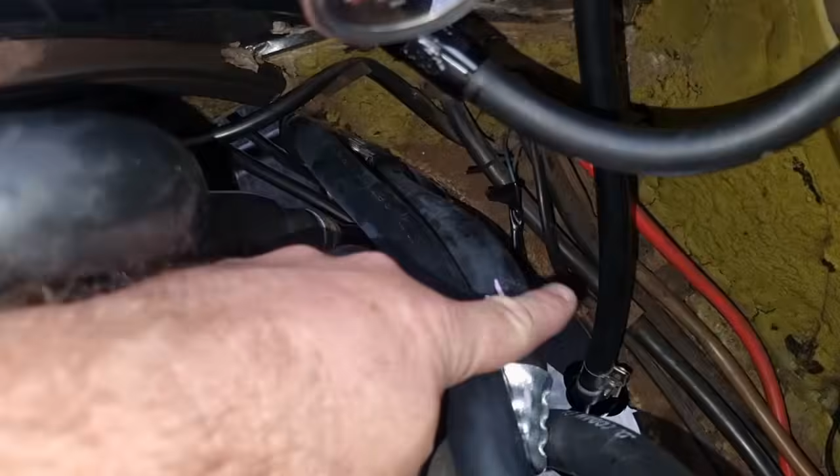Okay, quick video here. So yeah, inlet coming from, it's up here, goes in this side, outlet this side, it comes with this hose, and I've just looped it around, gone into the top here. Bottom one, I don't even have anything hooked on it at the moment, it's just for vapor, I'll just leave it for now. And the bottom one is a return line, that won't be under high pressure, so I've just used normal hose and I've gone back into my tank with that one.

I've just used normal hose for this, and up to here it's good for 50 psi. This only runs at 42 and then it vents back.

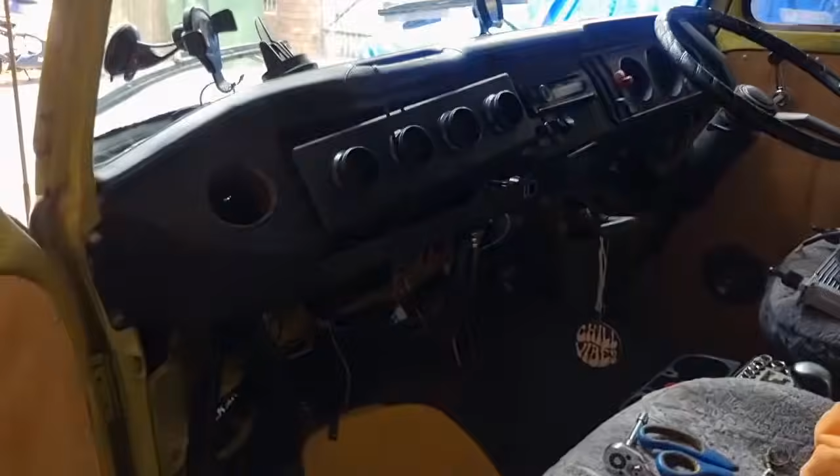Okay, Kombi doing a heater tap. Subaru have a bypass heater system, so originally I just had a simple heater tap to run this aircon slash heating unit. It does both. That's going to get tucked further in, I'm not finished.

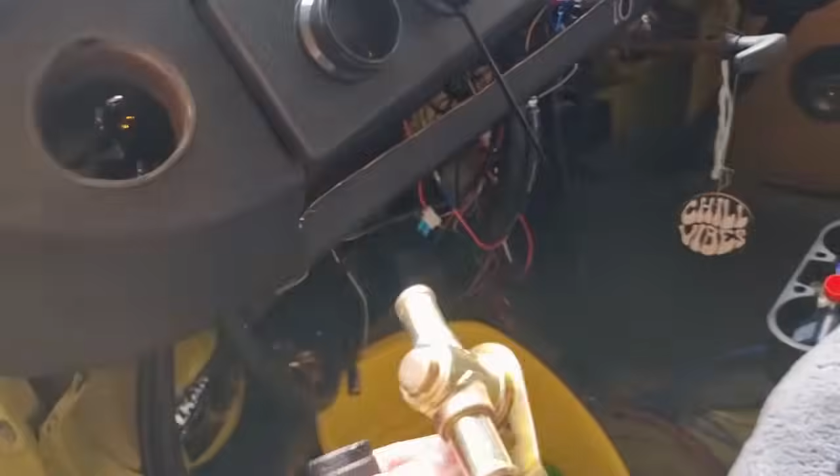Anyway, apparently it's best for the engine if the water keeps recirculating back with Subaru, so just shutting it off wasn't doing anything. And what I was finding was I was still getting a lot of heat coming through here. This was getting really hot, and when I put the fan on it would blow hot air constantly. So the heater - I don't know, there's something like the water just stayed warm.

So what I'm doing is I ended up having to buy this contraption of a bypass thing. It's got 4 outlets. I'm in the process of fitting it up now. Oh, there you go. And a valve. So it basically means that the water keeps recirculating through.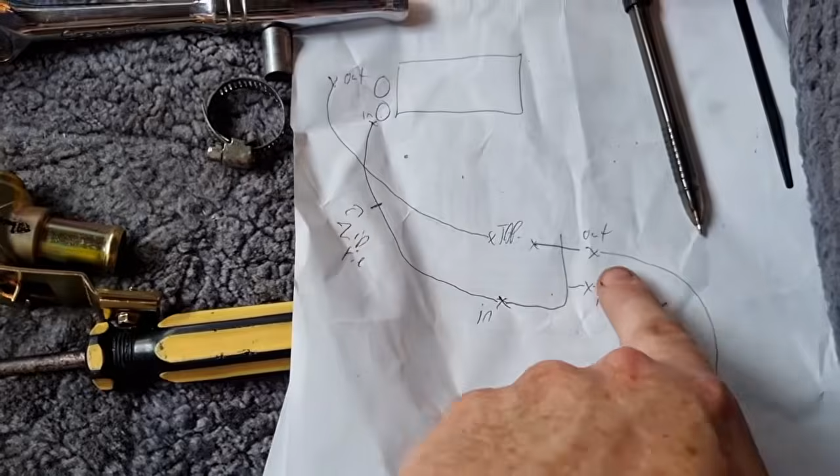A bit like this, it's a dodgy thing. It comes out of the engine, goes into this tap, and that's where the valve is. When that's shut, it shuts off the water going here and bypasses it back around, back to the engine without causing any weird overheating or pressure issues. So it's constantly running back into the engine, but then when you open the valve, it allows it to come through this way and bypasses it up through the heater core, and then it comes back down in there.

Now I'm going to put this other tap just in place here because I'm finding that you get a bit of heat sink, and I'm trying to put it as far away as I can from the heater unit, because I notice that when this valve is shut, it allows the water to flow up here and back through there, and it blocks it off here.

But if you have it open, when it's coming up and around and back down, this is also still open for some reason. There's no other valve there, so water can go back that way, but you're going to get a little bit of heat sink coming up through this tube, and it might heat it up again.

So because I have this tap, I'm just going to put one here too. That just means I'll have two different options. If it works without it, I'll leave it open and it can flow straight through. But if I'm still having heat sink issues up here, if I shut this one off at the same time as this one, especially in summer, the water will have no other direction than to go that way, and there will be no heated water getting into the system. So that's what I'm doing now.

Test drive in the Kombi. Temps and vitals looking good. Aircon's running, so it's quite noisy. Freezing cold aircon.

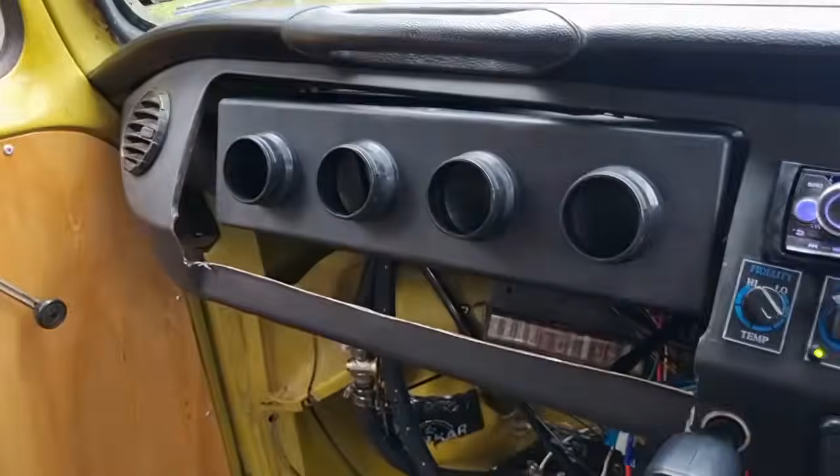The heater taps seem to be doing their job, they're off. Just sitting at idle for a bit, letting it heat soak, seeing what it's like. Then I'm going to do a quick run in a 100k zone for a while, see how that goes, all whilst running the aircon. Today's a little cooler than it has been - it's been mid-30s today, so I think high 20s now. Decent temp to test it in, but not the best. Really, unless the temp goes up over say 105, 110, I'm not too worried. Most of the time it goes to about 90, between 86 and 96. I think the fans don't even kick on till like 94 or 95 or something. So fingers crossed, we'll see how we go.

With the aircon, you could just leave it as is and have it all blow freezing cold air onto the passenger, but I wanted to vent it to have a demister on each side and up the middle. So I found this 51mm clear flexible tubing to do the job. It looks messy at the start, but the end result came out okay for me.

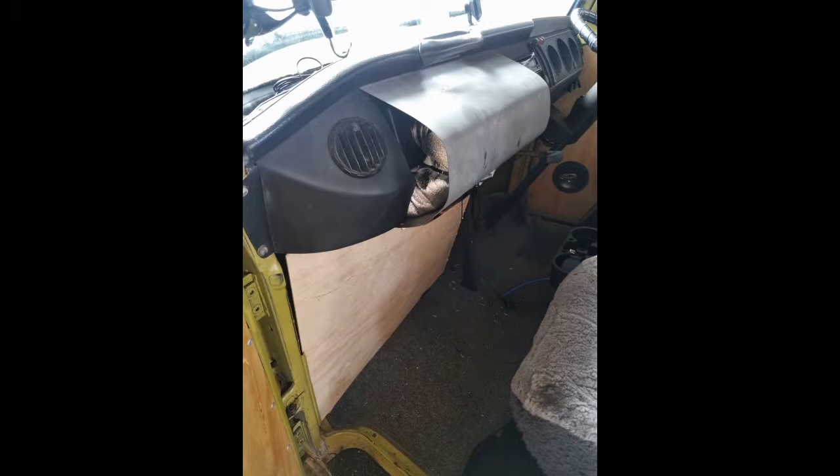As you can see, I've had to run the tubes down and under, going to different areas. I've changed it since, but it's all covered up now. We covered it with the normal board down the kickboard, and I made this little metal fold over it, and I've since painted it black. You'll see at the end of the video, it doesn't look too bad, doesn't stand out that bad. There's still plenty of legroom for the person, but if you want to go back to just having open vents blowing straight on you, you can do that and buy little swivel vents. But as I said before, my car, my rules.

Okay, and this is the end result. It's all mod plated. Been driving around a bit testing it, did about 100k, 1 hour long sort of trip, a bit of running around the other day, and it just drove perfect.

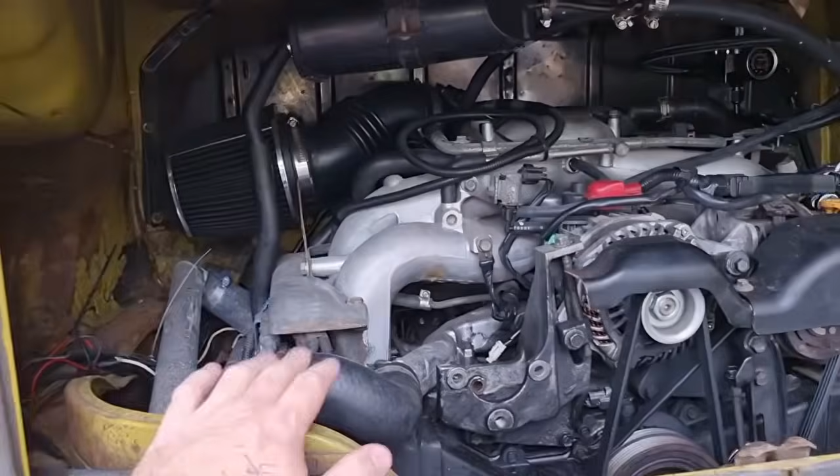So a few teething things I'll run through, so that might help others out. Burping the cooling system - if you're running a belly mount, you'll have to look that up, people have covered that a lot. You will need a high point somewhere in here, usually your filler bottle or reservoir bottle somewhere high. That helps.

In mine I have this spot here, but I have a front mounted radiator, so mine bleeds easily. But what I did find is that I had to give it a few really good runs, like putting my foot down to really push that water from the water pump through to get these bubbles out from the system, because I've got a few high spots here.

I am planning on cutting this, and I have a joiner that has a 1/8 NPT fitting, so that'll be able to bleed it out, but I'm also going to use it as an extra water temp gauge. I might run a cold air intake off that later, or just from down there or something like that. But everything else is running right, got it regassed, the aircon's nice and cold. I'll quickly show underneath here a few things.

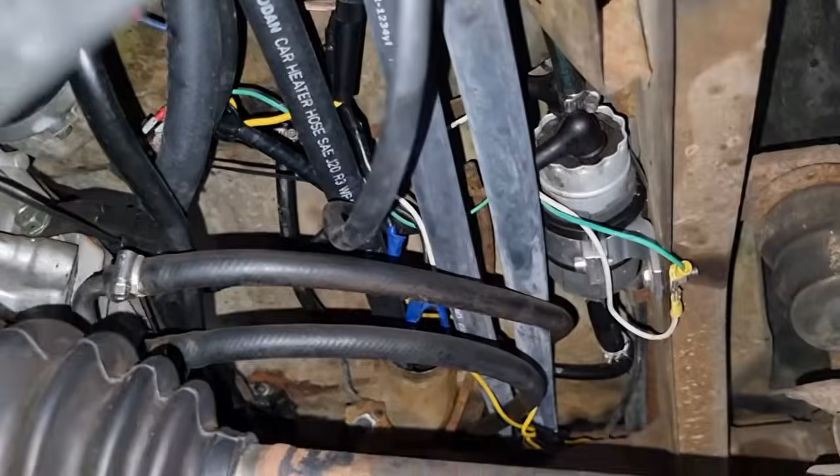So heaps of access for spark plugs and that's fine. I've just got a second fuel filter there. The fuel pump's just mounted up there. Lots of wiring everywhere - obviously if you pay someone to do it, they'll probably do it a lot neater than me.

But that's the transcooler lines, I just run them out there, down to here. If I can point to them - there's a little one there, one of those heatsink ones, and there's a fan operated one there. I've put a thermo switch on that to come on at 190 or 195 Fahrenheit and back off at 175, I think, and it's only kicked on twice in the times I've driven it, and that was on big drives, 100k an hour zones for quite a while, and then in some traffic. So pretty happy with that.

I am going to run a temperature gauge on the trans as well, just to monitor things.

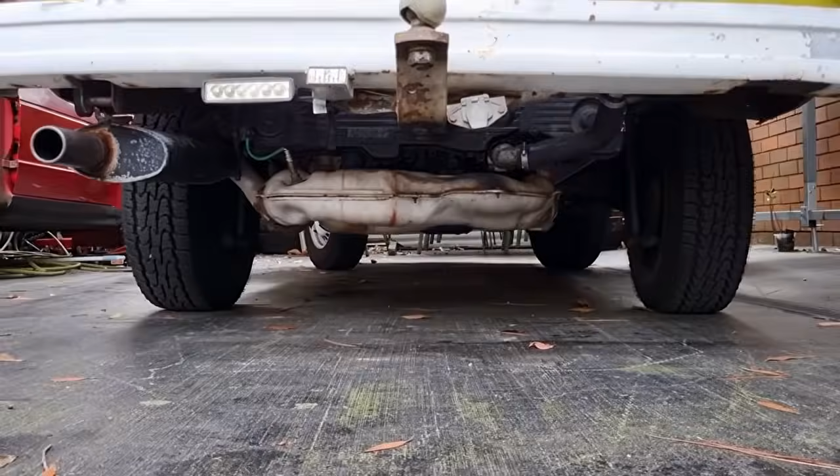Excuse my dodgy little skid plate there, it's just a bit of stainless steel I had sitting around, and I wanted to put something under it because we may go up sand, up some drives. You can see unfortunately now it does sit lower than I wanted for us to go off-road - it might not be the best option for off-roading, because I'll show you this. You can see how much it sits down, it's probably a good 6 inches at least. So it does sit lower, as you can see. Knowing that now, I probably would have done a belly mount radiator. I did the front mount because I wanted clearance, but the fact that this Subaru sits so low, there's not much I can do about it now.

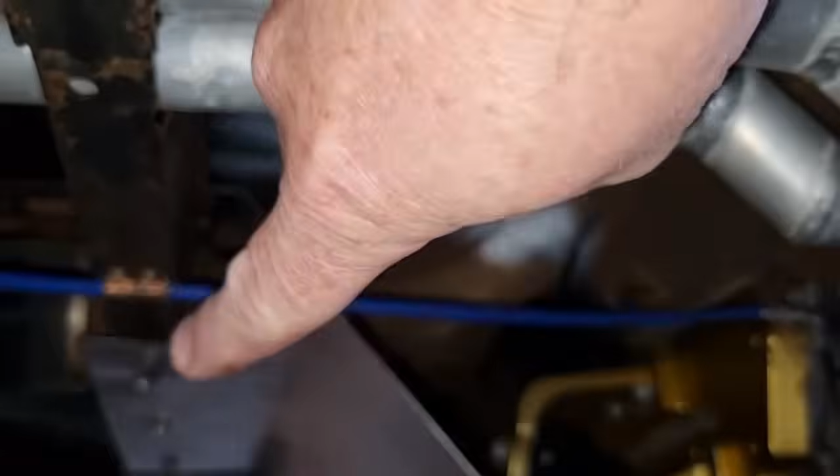Teething issues - the speedo cable, it works but as you can see, it's not pretty. Unfortunately the main issue with it is it's a multi-sleeve kind of thing. It's got the actual rod, then this other metal sleeve, and then the plastic sheath, and it just moves - it's very sensitive, the shifter, to within a few millimeters. So what I was finding is this wouldn't come back far enough to go into park to start the car, because the little rod would slide. So I've tried all different things, including up here - you can see just up there, sorry about the camera work - just to hold it really tightly in place, and I even had to do a bit of araldite and stuff just to stop the sliding of the outer sheath, because I really couldn't screw it on anywhere else yet.

I have to come up with a different solution, although it is working for now. The other option is Phil Hocken and that do a shifter kit, a push button one with a solenoid there, that'll make life a lot easier. But because this is a sports shift one, I wanted to have it so I could select gears, but I think he's made one like that now. So yeah, that's one little teething issue.

Not much else, I'll show you in the front. I've just been, so the shifter sits in there, this is the cover. I'm just going to tidy this up, seal around here. That's just all part of that.

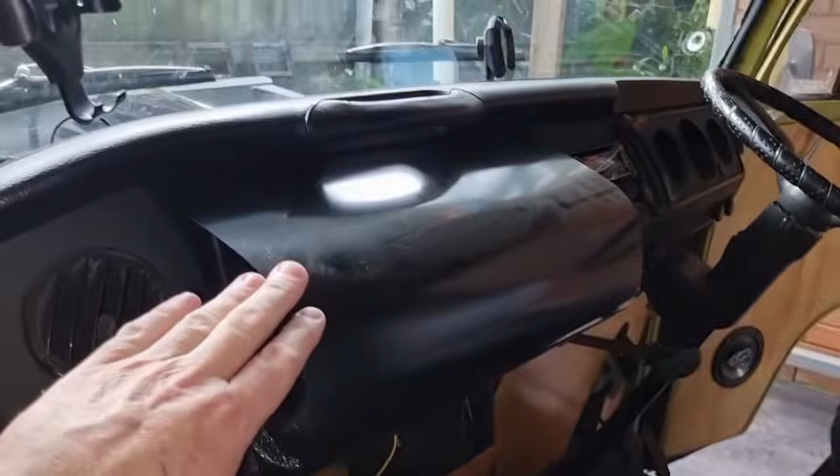Now the aircon, so that's sort of the end result. This part here doesn't look as big and nasty. I mean my whole car's a bit how-you're-going, so I don't really care about having that little lump there, doesn't sit out as far as you think. As you can see, it wouldn't even hit the back of the steering wheel, but it does allow, if you don't like that and you want to run the aircon like I did, just put vents in it and blast it out at you, and this person will get really cold - the driver will get overheated, but whatever.

So I've got it coming out here, this vent, the other vent, a demister up there, and I even ran another tube all the way down through and up to here like a little periscope. The purists are probably rolling in their graves right now, but I really don't give a shit. So that can turn, it's like on a swivel, so I can just turn it - it's just PVC. So when the kids are in the back, which I've got a heap of crap in the back of my car at the moment, it can blow cool air into them and help them out in summer.

And when they're not, and it's just me in the car, I'll get extra cold air onto me in the driver's seat. So it works really well. Ain't pretty, but it works.

This is an OBD2 port thing, cheap one off eBay. I don't even know how much it was, 50 bucks or something, cheap. Plug straight into your OBD2 port, gives you RPM and temperature and a bunch of other stuff. It's fantastic, so no need to worry about running all the other original gauges.

I haven't hooked up an engine light or alternator light, but I can monitor a lot of stuff from here, almost everything except for oil pressure. That's the only thing I can't monitor yet.

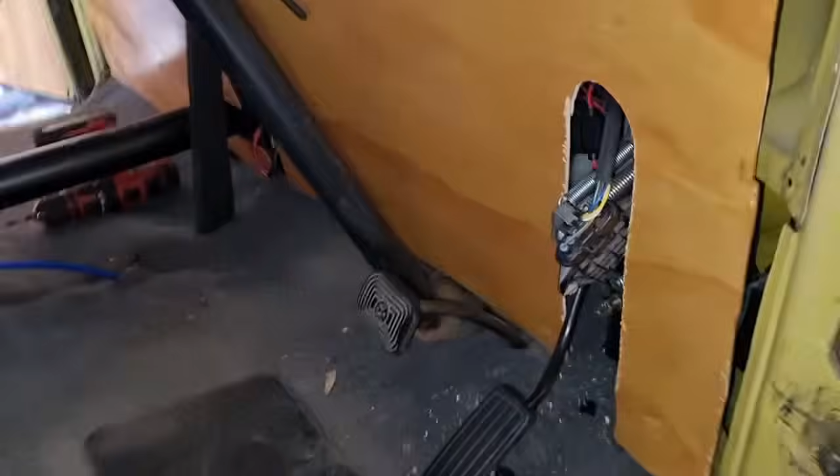You can see I still got the shavings here, so it's far from finished. I just quickly chopped this out so I could fit it in. Sure, you can make up something neater to cover it up, make it look nice, but the pedal sits quite good. I just had to bend the rod slightly.

So this is the factory pedal. You see I changed the spring, a lighter one, not one of the stock ones, and it just gives a nice feel. It goes right down nicely to the ground.

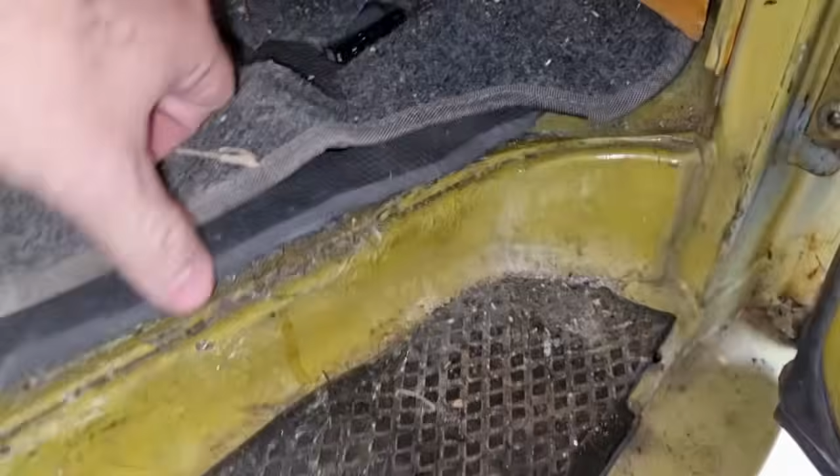All I did was to help my heel feel a bit better, I've got some of this here and I've chopped it out down there so it can go right down to the floor, but it sits my heel just nicely and it's not far off the ground, as you can see, and it works. Simple solution.

Yeah, does the job. And the front mount, that's kind of how it's ended up looking. The radiator, the aircon, I ended up running, don't know if you can see it, there's another fan in there, and that's for pushing the air through the aircon, which is sitting in front. There you go, you can see it just there.

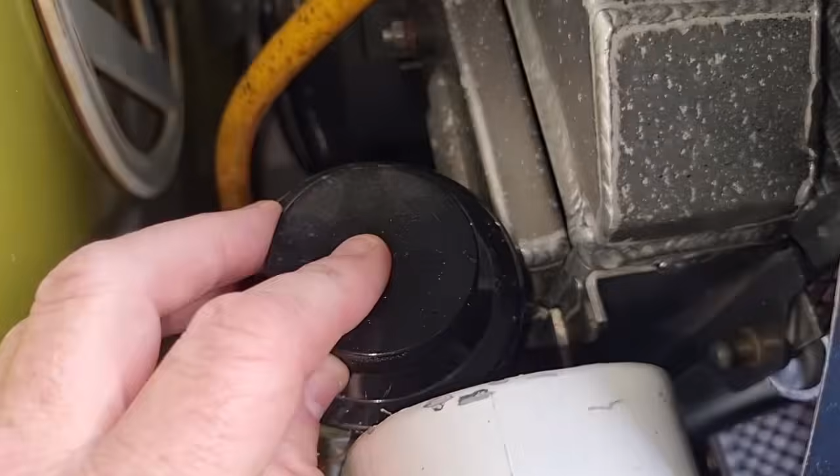And then a little expansion tank here. Had to drill a hole in it to depressurize it, otherwise it was the wrong style for this car. Just all your aircon gear there, and it runs down. We've wrapped some tape, make it look a bit ratty.

Yeah, so that's it pretty much. I know it's not everyone's cup of tea, but it's mine, and I love it. It suits us.

I'm sure there's plenty of other questions that people will have, but I hope the video, I'm sorry about the length, I'm sorry there's so much info, but I wanted to try and put it all in one just to help everyone as a resource, just to show my journey with it.